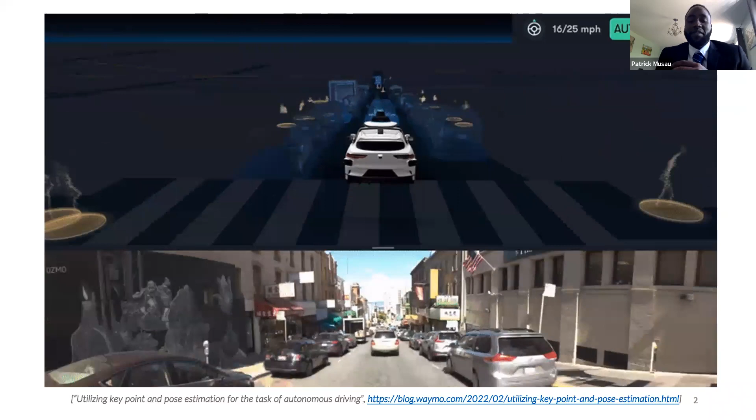Over about the last decade, with steep advances in sensing technology and other hardware, there's been a real interest in using AI methods to lay the groundwork for the proliferation of a diverse set of semi and fully autonomous systems. One such example is the growth of the autonomous vehicle industry, which according to McKinsey has seen over $330 billion invested into over 2,000 mobility companies since 2010.

And while much of the technology within this space has moved forward expeditiously, formal safety assurances for these systems still lag behind.

So building these systems is quite a complex endeavor, and it requires designing the system such that it can navigate in dynamic and uncertain environments. A task that often combines traditional programming with machine learning, since some actions are difficult to characterize explicitly, and they're more easily derived through data-driven procedures.

So as an example, autonomous vehicles frequently leverage machine learning to semantically parse their environment and navigate appropriately. Unfortunately, as we've seen in recent years, some of the advantages of machine learning come at a cost of fragility. And what I mean by fragility is that these components can fail in unexpected ways.

So in a famous study by Christian Szegedy and his colleagues, the authors demonstrated that by carefully applying small modifications to input images, you could cause these components to produce incorrect classifications. These inputs are known as adversarial examples, and their discovery has really caused concern over the safety, reliability, and security of these machine learning applications.

But beyond adversarial examples, the number of edge cases that an autonomous system must be able to handle is quite large in practice. And despite our best efforts to estimate all the foreseeable scenarios that these systems must be able to deal with, we don't have any way of knowing that we've identified all the possible threats to, or even the failure modes of the system.

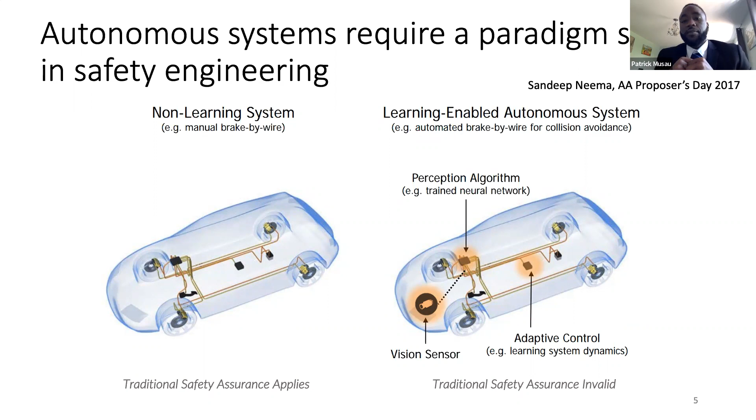The safety assurance arguments we develop for these systems must deal with the reality that realizing autonomous technology involves a combination of heterogeneous physical, networking, and software components, yielding systems with numerous interfaces and interrelations that require careful attention. Systems that exhibit these interactions are referred to as cyber-physical systems, where the underlying principle is that computational and physical aspects cannot be easily decoupled.

As an example, changing the rate at which software executes within a particular component will have consequences on the types of behaviors it can enact. So the safety assurance question for cyber-physical systems requires interdisciplinary efforts drawing from real-time systems, control systems, hardware design, and safety engineering.

But even more important is how these systems are integrated to form a cohesive whole, which is itself a non-trivial problem. To this end, the two research questions I addressed in my PhD are: one, how do you develop safety assurance arguments for autonomous systems that operate within dynamic and uncertain environments? And two, how do you reason about safety when machine learning components are deployed within these systems?

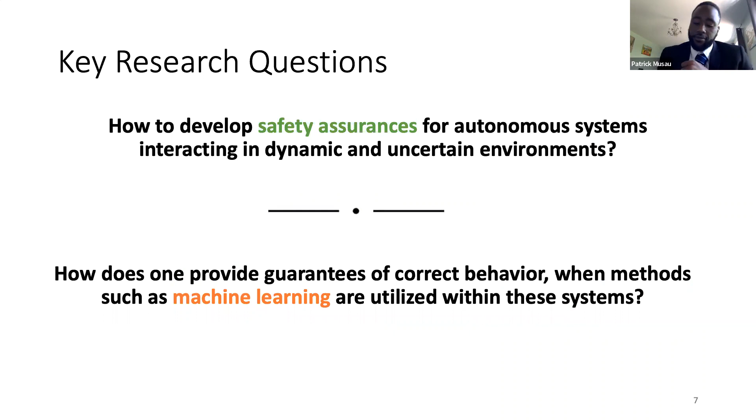Much of the work I've been involved in draws on formal methods, a class of mathematical techniques used to specify what the system can or cannot do. This framework is governed by the use of models or abstractions of the overall system, which might include modeling its physical dynamics as well as the underlying software. Using these models, you can analyze the behavior of the system and check if it satisfies a set of requirements derived from industry standards and best practices.

If the system satisfies these requirements, then you can provide the artifacts that led to that conclusion. But if not, the task is to obtain an example of incorrect behavior that can be used to refine its construction. These analyses are often done at design time.

We want to ensure the system is constructed properly from the beginning and avoid expensive, non-trivial changes that would be necessary if these analyses were done after the fact. However, we also need to perform such analyses online to make sure our design assumptions are still valid at operation time, since at design time we don't have any way of knowing we've identified all the specific threats or failure modes of the system. So it's imperative to continually monitor the system as its objectives and environment evolve.

With that in mind, my work over the last couple of years can be divided into two camps. The first is the design of runtime assurance techniques for components within autonomous systems. The second camp is helping create design-time assurance techniques for machine learning components.

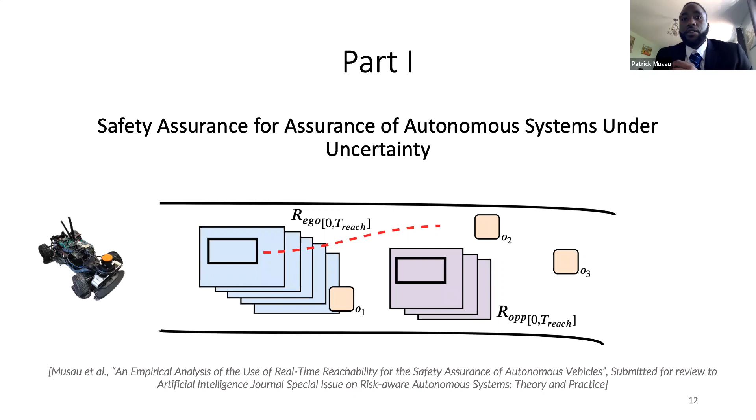I want to start first by introducing the three major building blocks of autonomous applications and highlight where machine learning components can assume a significant role.

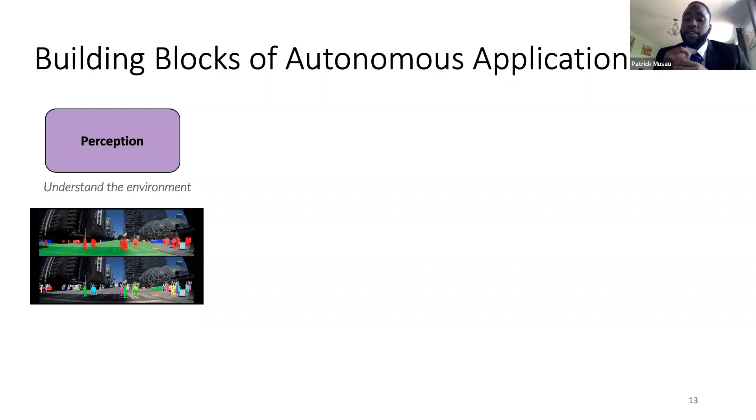So the first major task is perception. In order to successfully navigate through the world, the system must have a deep understanding of its environment and how this environment is evolving over time. Based on this understanding, the vehicle must then come up with a plan for how to move in this environment in order to accomplish its high-level goals.

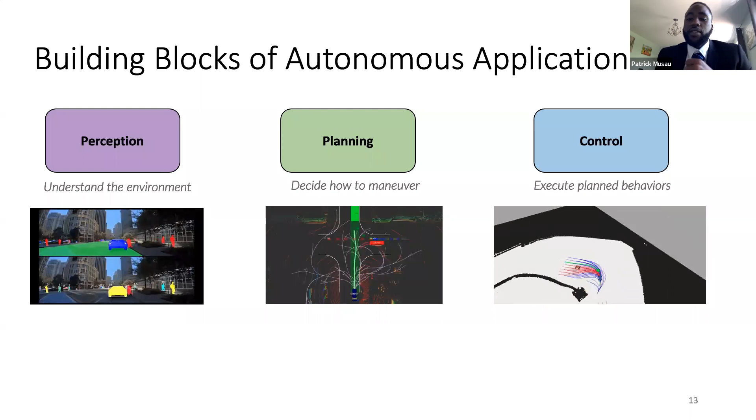Once a plan has been generated, the vehicle then needs to be able to generate the steering and throttle commands that allow this plan to be executed. The interactions between these tasks determine the success of your system.

Classically, machine learning has been used within the perception and control stacks due to the inherent complexity of outlining the relevant operation zones where the vehicle can drive, classifying and tracking obstacles within the environment, and even projecting how humans or other vehicles will move within this environment. Since manually coding up solutions to all the possible scenarios is infeasible, machine learning models are an attractive solution here, since you can train these models to handle these tasks based on massive data sets of driving these vehicles in a variety of contexts.

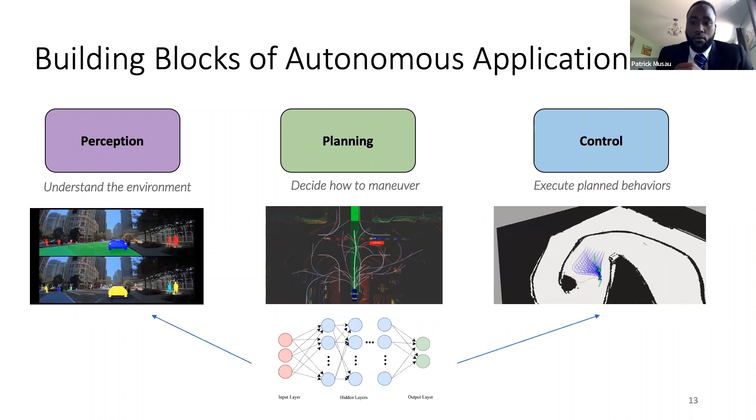So now if we assume that we have some working model of the system, or we have some solution to the previously mentioned tasks, one of the things that we like to do is demonstrate that our implementation is robust and works well in practice.

One of the questions that we like to answer is what happens if the predictions that our machine learning components are making about the environment are wrong, and lead the system to make a bad decision. In this case, what we'd like to be able to do is intervene whenever we think an errant decision has been made, so that our system remains safe at all times.

One of the ways this can be done is by forecasting the effects of the control decisions made by the components in your system, to see, for example, if they ever lead to a potential collision. If you can do this rigorously and effectively, then you have a robust way of arguing that your system operates correctly.

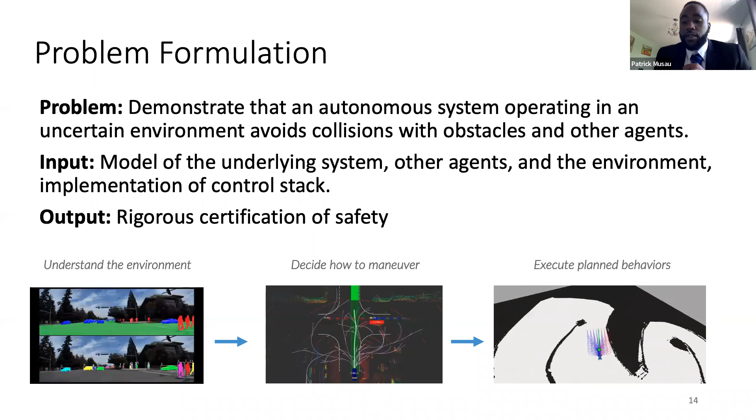So now one way of reasoning about the correctness of a system over a large set of scenarios is called reachability analysis. One of the key benefits of reachability analysis is that if you have a realistic model of your system, then what you can do is forecast the evolution of the system over a finite time horizon that you're concerned about, and obtain the set of behaviors that your vehicle enacts.

Here, I'm referring to dynamical systems analysis, where you have some model of the physics of the vehicle that is often described by a mathematical tool known as a differential equation. Based on the control decisions of your components and the model of your system, you can use these equations to obtain the future evolution of your system.

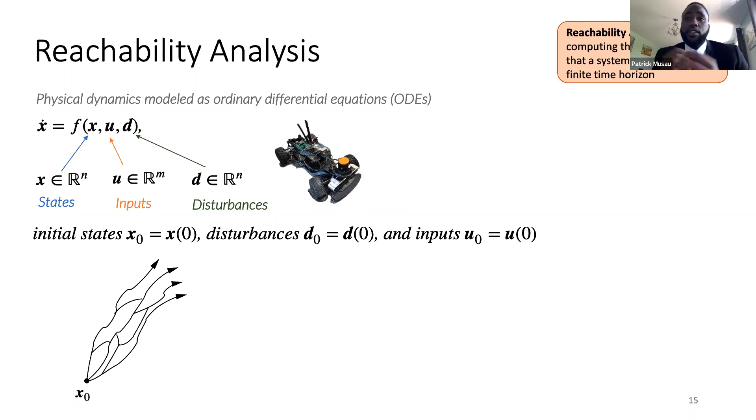While you can do these as point-wise analyses of the system, where you have some unique estimate of its initial state, one thing you might be concerned about is the evolution of the system over large sets of scenarios. You would like to be able to reason about the correctness of your system for every point within that space.

So now the problem becomes rigorously reasoning about the evolution of your system over sets of initial states, inputs, and even potential disturbances. The nuance here is that you're not discretizing these sets and then performing your analysis, but rather you're rigorously exploring the behavior of the system for every point contained within that set.

Now, there's a rich set of literature and software tools available for the reachability analysis of many types of systems. One of the key characteristics of these approaches is that it's often prohibitively difficult to obtain the exact reachable set for many classes of system models.

So you customarily compute a sound over-approximation of the set, such that the actual behavior of the system is contained within that larger over-approximation. There are many ways of representing that set, and depending on the type of representation you use, you can characterize the actual executions of your system more and more closely. The challenge here is that there's usually a trade-off between the fidelity of your reachable set computations and the time that it takes to compute them.

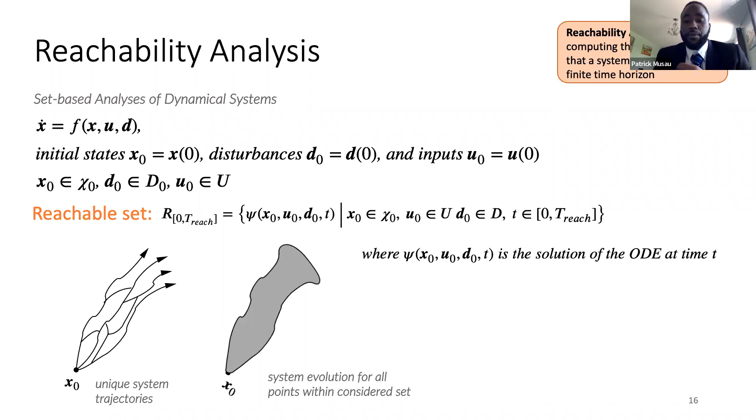As an example, if you use a set-based representation called hyperrectangles to describe the evolution of these systems, then these computations can be done in real time. In our work, we utilize this formulation to describe the autonomous platforms that we considered.

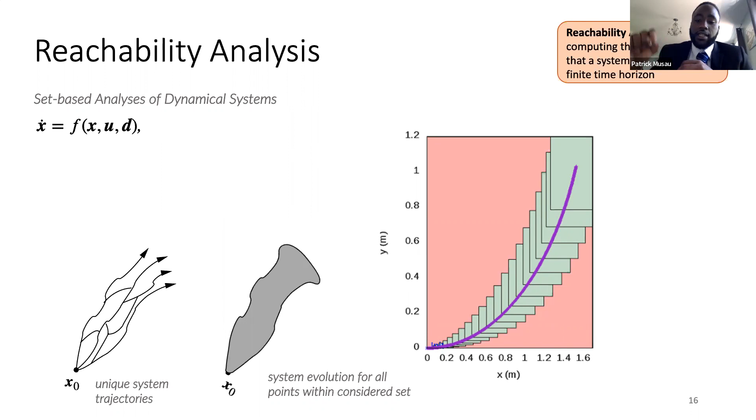In this figure, we are showing a 2-second projection of a left turn action for a 1/10 scale autonomous vehicle. The green rectangles here represent the set of states over this finite horizon, where this purple line is a simulation of a single point from the initial set that we considered.

So now coming back to the original safety question, the reason that reachability analysis is so helpful is that you can pose the safety problem as ensuring that the reachable set of your vehicle that you're concerned about never intersects with the obstacles within its environment, as well as the set of reachable states of the dynamic environmental participants.

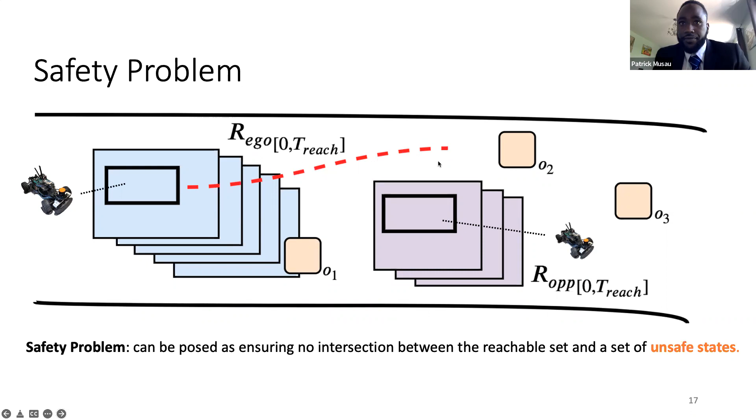So there are several assumptions that bear mentioning here. The first is that we have an assumption about the underlying dynamics of the car. In this case, those were obtained using a process known as system identification, where you record the data of driving the vehicle in a diverse set of contexts, and then use those experiments to tailor a physics model to be able to describe its behavior. In this case, we utilized a kinematic bicycle model, which is a particularly useful model for describing front steering vehicles.

The second assumption is we assume we have an accurate method of measuring the position of static and dynamic obstacles, as well as the position of the vehicle, which requires an assumption of accurate sensor measurements. And the final assumption is that we assume that the control action used in the reachable set derivation is constant throughout their construction.

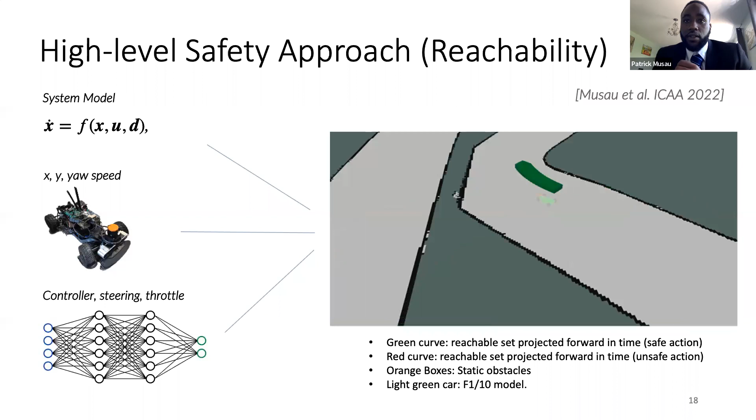So as mentioned earlier, one of the major challenges in autonomous applications is handling uncertainty. And since reachability regimes are inherently a model-based technique, the fidelity of our predictions is dependent on the strength of these models. And if they're not good representations of reality, then any safety declaration made through their use may be invalid. So as a brief introduction to these challenges, there are broadly three realms or sources of uncertainty within autonomous applications.

The first is that the vehicle's understanding of the world is largely mediated by its sensors, and there are limits to the precision of the measurements of these sensors, which might also be affected by the type of environment that you're moving within. So it's important to allow for sensing uncertainty in your reachability computations.

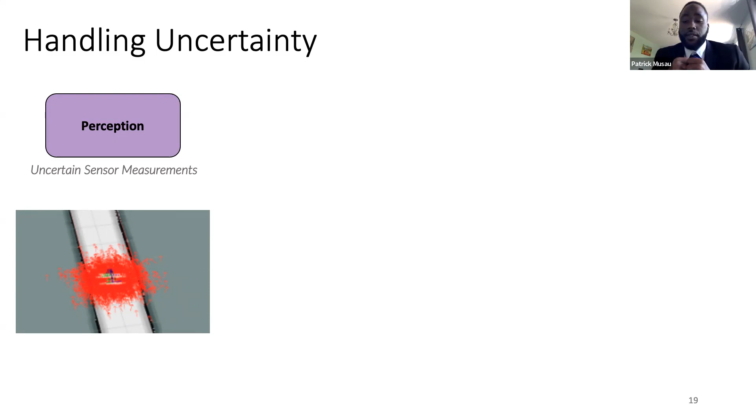The second major headache is that it's quite challenging to characterize the behavior of dynamic agents within the environment precisely, and the models that we utilize to describe their behavior need to be able to capture this reality. Finally, the models that we use to describe the physical dynamics of the system is inherently an abstraction of reality, and capturing its behavior precisely is complicated due to the presence of phenomena that are hard to characterize explicitly, such as drag forces, friction forces, non-observable disturbances, and other stochastic elements.

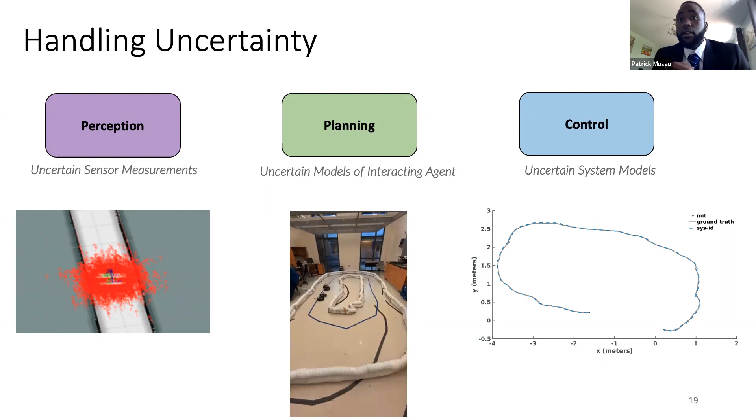So within the research literature, these two sources of uncertainty can further be classified into two major domains: epistemic uncertainty and aleatoric uncertainty. Epistemic uncertainty refers to the uncertainty that is attributed to a lack of knowledge of the dynamics of the system and its environment, and it can be reduced by conducting more comprehensive experiments of the behavior of your system, or even using a more precise set of sensors to better understand the environment.

Aleatoric uncertainty, however, refers to irreducible random uncertainty, and it is characterized by the variation of physical systems due to random effects. So within our context, an example of where aleatoric uncertainty would show up is in the models of the behavior of the dynamic agents within the environment. And while it's possible to come up with a probabilistic description of their behavior, in practice, the behavior of dynamic agents within the environment can be unpredictable.

But the overall idea here is that if you can come up with an estimate of the variance of these parameters in different contexts, then what you can do is use reachability analysis to explore the behavior of your system over these large sets of scenarios and see if the system satisfied the required levels of consistency, robustness, and quality governed by the assumptions of these estimates.

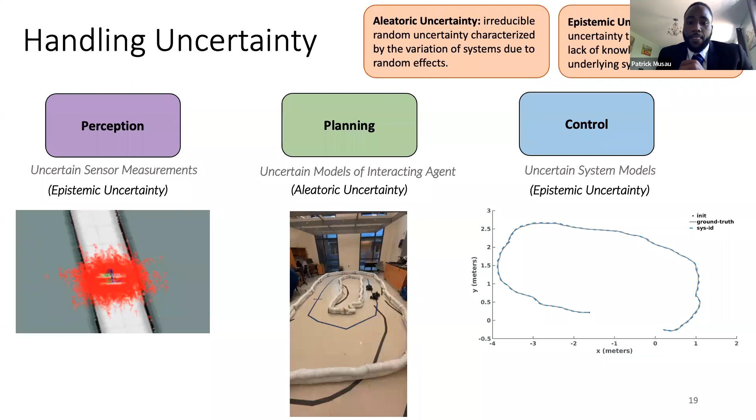So let's now think about uncertainty in a principled way. Let's assume that we have a model of the underlying system.

Since the experiments we've been talking about involve this 1/10 scale autonomous remote controlled car, let's assume it can be described by a kinematic bicycle model, which is a decent model for describing a front steering vehicle moving at reasonable speeds.

The dynamics here are represented by an XY position, a heading variable, and a variable describing the system's velocity. While this model applies to many vehicles in practice, to get it to describe the F1/10 model precisely, we had to tune three parameters within this model, mostly around the vehicle's velocity profile, to capture how the system's throttle commands affected its movement.

Specifically, the parameters we had to determine were the acceleration constant, the hysteresis constant, and the motor constant governing its behavior. As you can see below, we were able to obtain quite an accurate model using data collected from a large set of experiments.

Now let's assume that we want to describe the uncertainty in our estimates of the vehicle's state, such as its position or velocity. For example, let's say our estimations of the vehicle's position and velocity are only accurate to within plus or minus 10%. Then we can allow each of the variables in our model to be described by an interval, where an interval is a set-based representation of the ranges these variables can take on.

In doing so, you can explore all the evolutions of your system for all position and velocity values within that range. By allowing the variables in your dynamics model to take on these set-based representations, we can now model the behavior of your system by what is known as a differential inclusion, which is a generalization of ordinary differential equations to describe set-based dynamics.

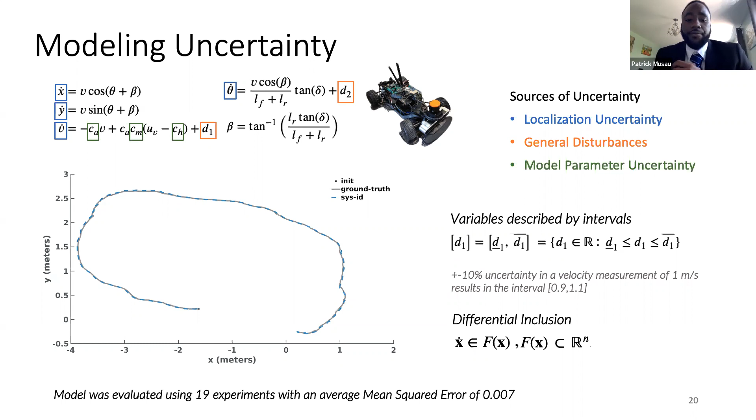So now let's look at how this looks in practice. One of the things we considered in our experiments was modeling the uncertainty of determining the position of the autonomous system, which is arguably one of the most difficult and fundamental parts of the entire process. In a real autonomous system, estimations of the vehicle's position within the world must be accurate to within 10 centimeters or better, which has resulted in numerous methods proposed for solving this problem.

Within this context, one of the most popular localization techniques are called particle filtering methods, which allow you to describe the vehicle's position using a probability distribution. The idea here is the position of the vehicle can be represented by a large set of particles that describe our estimates of the vehicle's position and orientation.

Typically there's a large number of these particles that converge around the vehicle, and they're refined using measurements from its sensors as well as presupposed motion models. One of the things you can do is explore the behavior of the system from all of these estimates to assess if your system is safe.

So now beyond localization uncertainty, how would you deal with the uncertainty coming from the vehicle sensors, as well as the uncertainty with respect to the evolution of the agents tracked by these sensors? Well, you can approach the problem in a similar manner.

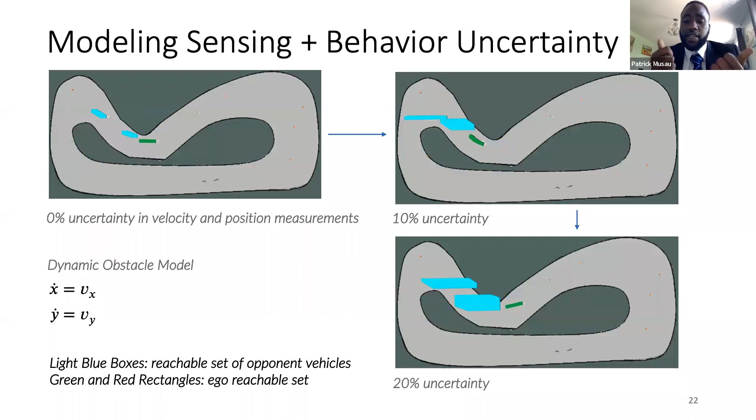The same can be done in modeling the underlying uncertainty in your system models. If you allow the parameters of your model to be described by intervals, such as the acceleration constant, the hysteresis constant, and the motor constant, then you can reason about large sets of behaviors utilizing this approach. A potential application of such an analysis is characterizing the behavior of your system operating on different road surfaces or even different weather conditions.

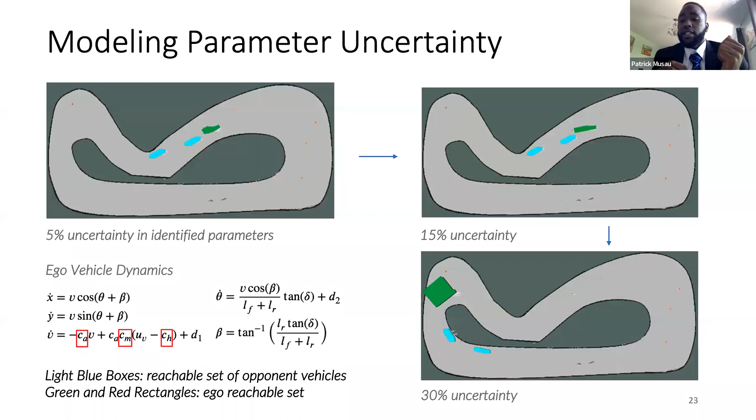Up to this point, we've been discussing how one would detect potential safety violations made by the controllers in a variety of contexts. But a crucial question that must be answered is what happens when a problem is discovered by a monitor, and how do you maintain safety within this context?

One of the most popular frameworks for satisfying both requirements is the simplex architecture. This architecture is quite useful for switching between a high performance controller that may allow you to perform a series of really complex maneuvers, and another controller that may not be as performant, but you know will maintain safety.

Let's imagine the system is making use of a controller, such as a vision-based neural network. They might work quite well in many settings, but sometimes produce bad predictions. One thing you can do is use reachability computations to detect when an unsafe decision has been made, and then transfer control from this neural network component to a controller that's been designed to optimize for safety.

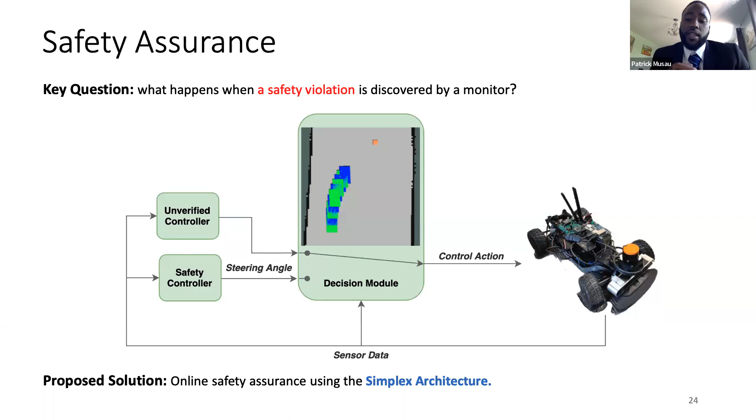A useful analogy of what we're doing here is a driving instructor's car with two sets of steering wheels and two sets of brakes. As long as the instructor is capable of intervening in dangerous situations, then the speculative student is allowed to drive.

So if you put everything together, if you leverage the reachability approach for the detection of these potential safety violations, and then make use of this architecture to switch between a high performance controller and an underlying safety controller, then what you get is a method for assuring the safety of controllers within autonomous applications.

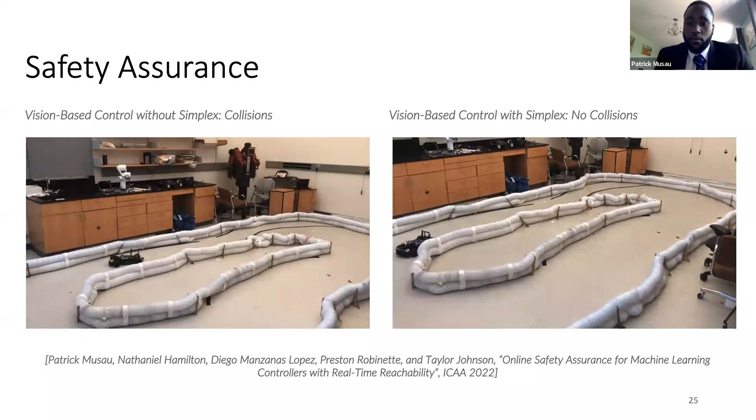Now, if we return to our conversation about uncertainty, you can also include these analyses within this context. What you will find is as you increase the uncertainty in the underlying models used within your reachability computations, the use of the safety controller within the simplex architecture also increases quite significantly.

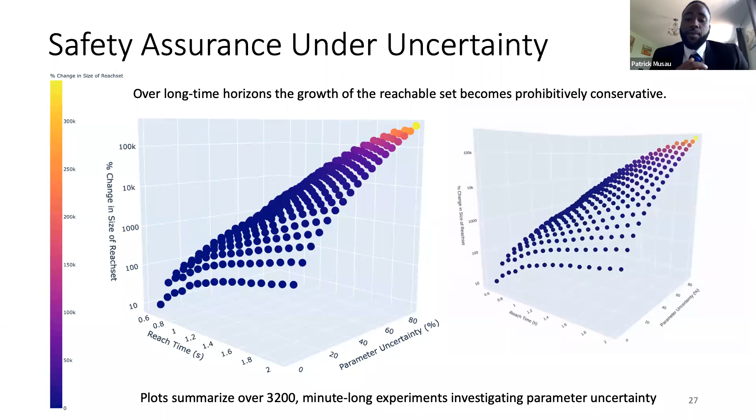To summarize what we've seen so far, we developed a reachability-based safety assurance framework for reasoning about the safety of systems in dynamic and uncertain environments.

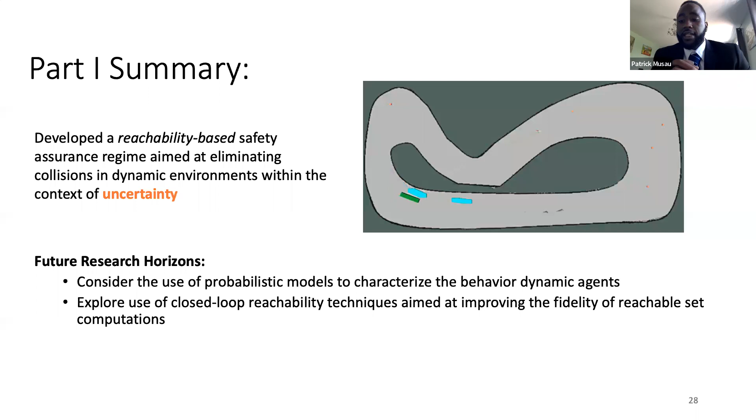In terms of future research, many autonomous systems make distributional assumptions about the environment, requiring probabilistic modeling, particularly around the behavior of dynamic agents. Extending this approach to consider the use of these models would be interesting. Additionally, one assumption we made was that the control action used in constructing the reachable set was constant throughout its derivation. It would be interesting to explore closed loop reachability techniques aimed at lowering the conservativeness of these resulting sets.

Now for the second part of my talk, I'd like to take a different perspective within autonomous systems development. In the last project, we were concerned with making sure the actions of these controllers did not lead the vehicle into unsafe situations. But we didn't consider the performance of these controllers at driving the vehicle within its environment, and the second part of my presentation deals with this latter objective.

How can you use reachability analysis to generate high performance controllers for autonomous systems? Specifically, the inspiration for this project came from our participation in an international autonomous racing competition known as the F1Tenth.

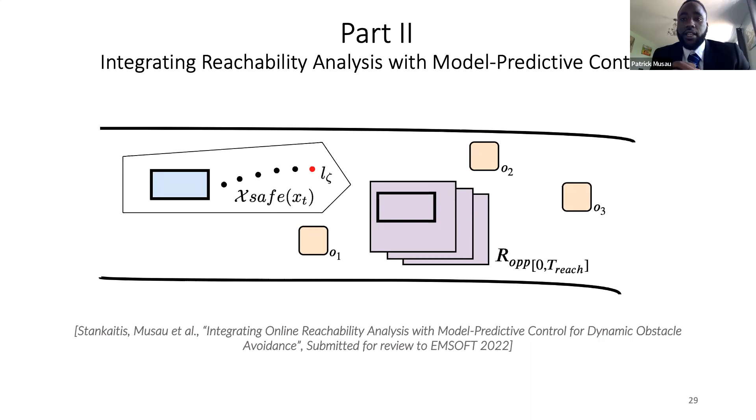It might sound counterintuitive to think about autonomous racing in the middle of a talk about safety assurance techniques. But one major motivation for considering the racing problem is that it allows you to study problems like high-speed obstacle avoidance and other high-risk maneuvers that may be too dangerous to consider in urban settings.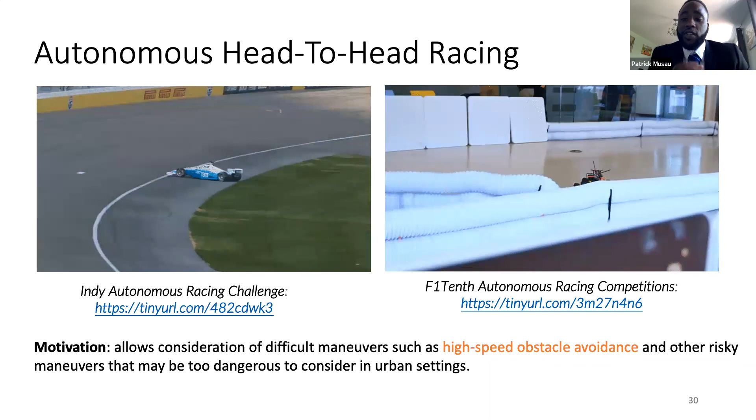There have been several high-profile competitions over the years, such as the Indy Autonomous Racing Challenge that occurred at CES earlier this year, where teams from 21 universities competed in a series of races involving full-scale Formula One racing cars at the Indianapolis Motor Speedway. There have also been smaller scale competitions occurring biannually at conference venues across the world, known as F1Tenth. One major challenge is figuring out how to deal with the aggressive and uncertain behaviors of opponent vehicles at high speeds.

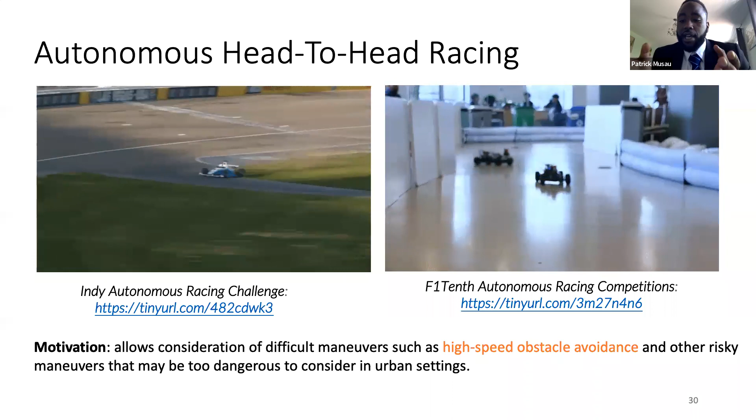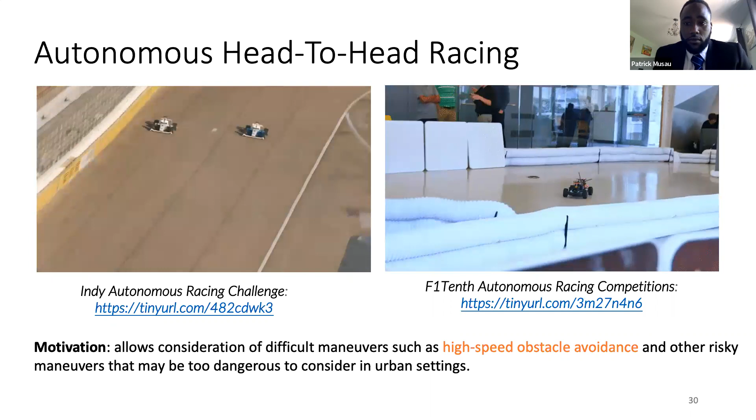As you can see from the GIFs on screen, optimizing for speed while ensuring you don't crash is not straightforward. Fortunately, we've already seen how to handle uncertainty in characterizing the behavior of dynamic agents within the environment. Building on that work, our idea is to design a controller that explicitly uses our estimation of their reachable sets to avoid entering situations where a collision is likely. If we can avoid this set at all times, we can have a reasonable guarantee that we'll be safe. So the question now is, how do you generate these controllers to accomplish this task?

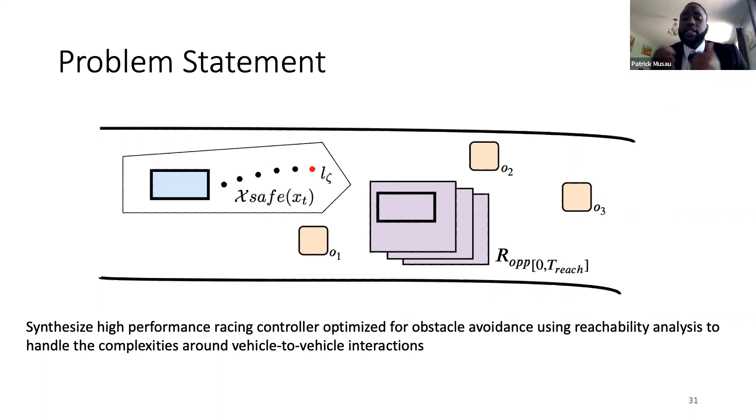One of the most powerful methods for solving this problem falls under a framework known as model predictive control. This is an optimization-based method for determining the best set of control actions to perform some underlying task. For example, if your desire is to find the steering and throttle commands that allow you to follow the best racing line, you can view this as generating inputs that minimize the time needed to travel along that trajectory, while not deviating from the racing line very much.

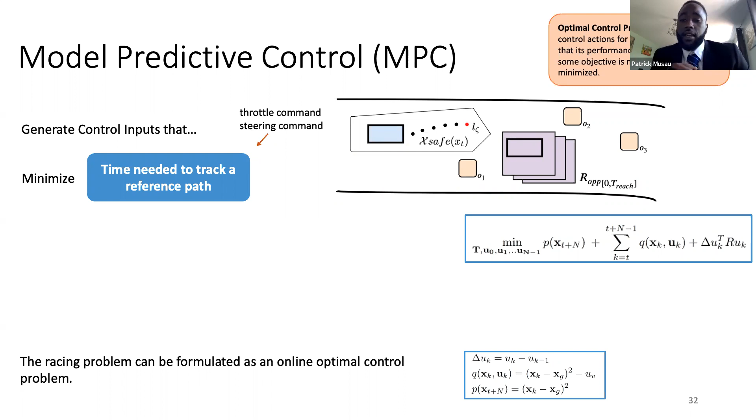One thing that might happen is that you simply follow this path at maximum speed. But that's undesirable since the chance of spinning out is quite high. You want to generate these inputs in a way that respects these constraints. To do that, the approach must take into account the physical dynamics of the vehicle, as well as constraints on the types of actions it can take.

For example, these can be limits as to how fast you turn or even accelerate. With these constraints, you can ensure that the actions produced by this framework will be reasonable in nature. One thing to note is that the search for these inputs is done continuously as you move throughout the environment, and you're really only considering the best actions to take over a short time horizon. This allows you to deal with the dynamic nature of the environment as well as the vehicle.

So far what I've laid out is the classic setup of model predictive control. What you can do is augment this framework to include constraints derived from your desire to avoid obstacles, including the reachable set of opponent vehicles as well as static obstacles. This is primarily what we looked at doing in this project. The idea is to limit the search space of the optimization problem to guarantee that the inputs generated by this method allow you to remain within a safe region of the state space.

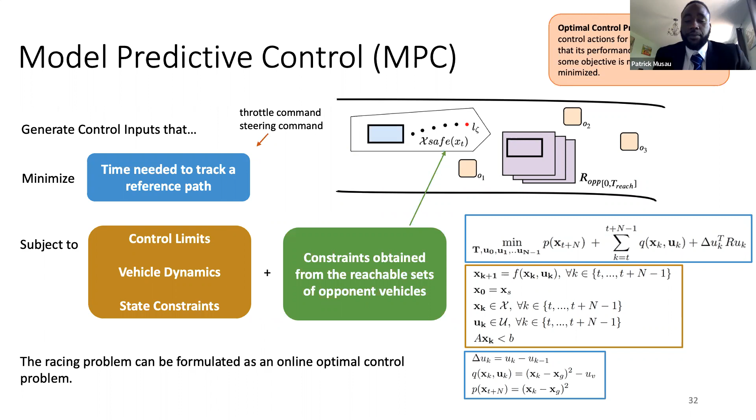So while this seems relatively straightforward, one of the challenges of requiring the vehicle to assume positions outside the location of obstacles is that it converts your search for the best control action into a non-convex optimization problem. But what does that mean?

The idea behind a lot of optimization problems is that we're trying to minimize the value of some function that may capture, for example, the time needed to track a path throughout the environment. If the function is convex, then finding the value that minimizes this function is relatively straightforward, and you can be sure that the answer you're given is indeed the best answer. But if the optimization is non-convex, then the problem is significantly harder and takes more complicated strategies to find the best inputs.

Although some good solutions to this problem have been proposed recently, convex optimization approaches are generally far more efficient. So what we'd like to do is come up with a way of specifying our safety constraints that allows us to generate these actions quite efficiently.

If we look at the existing literature within this space, there have been two main approaches to solving this problem. The first camp of methods have entirely avoided specifying safety constraints as part of the MPC problem, handling them instead within the planning layer of the autonomy stack.

So instead of generating control inputs that are guaranteed to be safe, you can instead synthesize a safe trajectory and then simply track it. A challenge here is that many planning approaches don't reason about the underlying dynamics of the vehicle to a sufficient degree when planning, which can sometimes lead to behaviors that are less than optimal. At the same time, many approaches cannot be executed fast enough online to deal with the high speed and aggressive behavior of other vehicles.

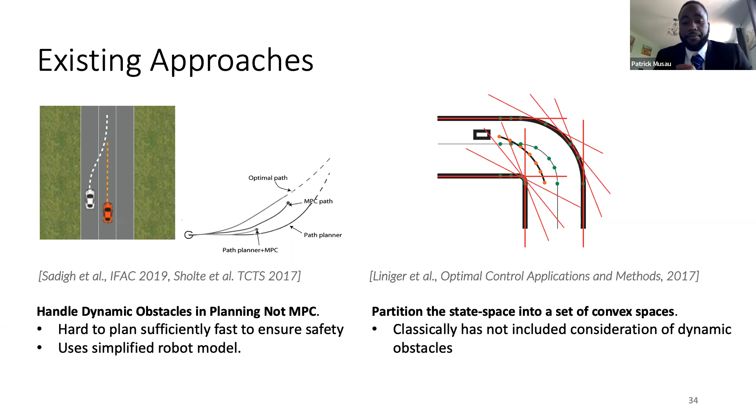So building off their work, we explored altering their approach to handle dynamic obstacles by letting these planes have different positions and slopes depending on the state of the vehicle. This would allow you to handle the case where a dynamic obstacle is directly in front of you, and it would also allow you to increase the space where the vehicle is allowed to navigate.

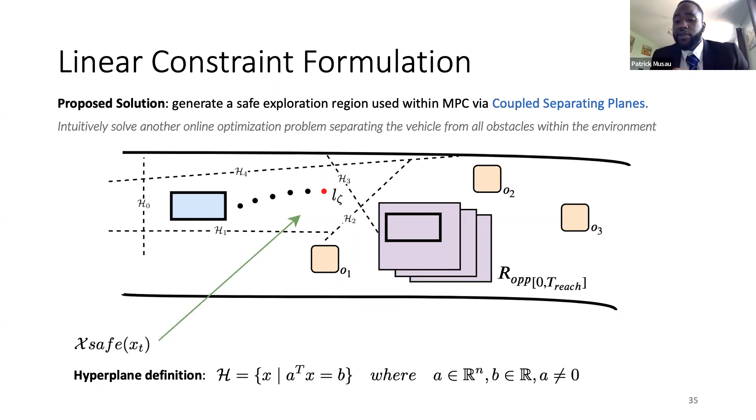Now, there's no requirement that you only use two planes, and in practice you can use as many as you would like. However, one of the challenges here is that in order to determine their slope, you have to solve another optimization problem online that generates these planes. In most scenarios that we considered, two planes is sufficient. If you use this formulation, you now have a way of specifying your safety constraints in an efficient manner.

So now if we return to our original problem formulation, what we've effectively done is circumvented the need to encode the requirement of limiting our search space to be outside the space of obstacles, into deriving these two linear constraints represented as planes. In doing so, the problem can now be efficiently solved by existing model predictive control tools.

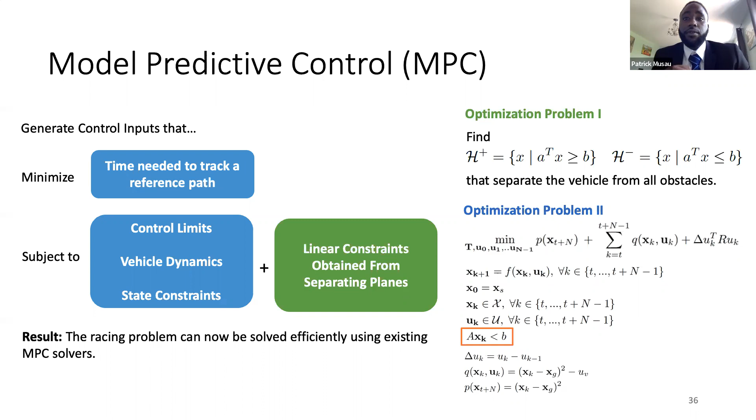I'd like now to show you a demonstration of evaluating our approach in numerous contexts. On the left, you can see the approach proposed by Alex Liniger and colleagues, where parallel lines are used to describe the safe region. On the right is our extension, allowing the slope and position of these planes to be altered online.

Based on sensor data and our reachability computations, the red boxes are a set of dynamic obstacles whose evolution is determined only from vehicle sensors. The blue rectangle is an opponent agent whose behavior is described by our reachability computations, and the magenta dot is a target point we're trying to reach as we navigate the environment.

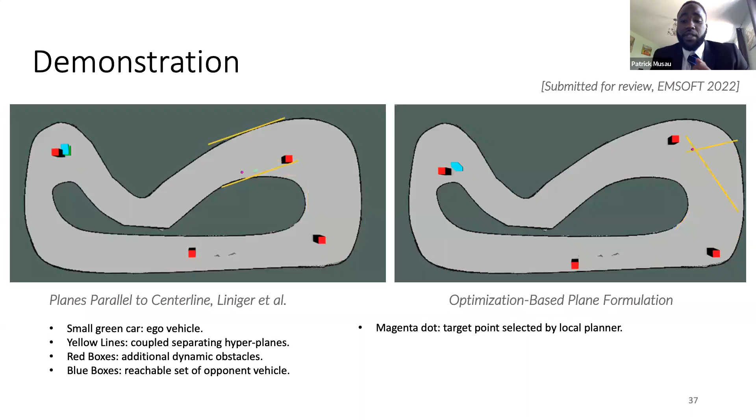This target is synthesized by a couple of different planning techniques. Our evaluation was quite complex in the types of scenarios considered, and in practice it was quite successful in dealing with the dynamic nature of these environments.

So what are the challenges and limitations of these approaches? As previously mentioned, one challenge with the parallel plane formulation is that it can fail when obstacles are directly in front of it. Avoiding collisions is highly dependent on the underlying local planner guiding the selection of a target point that MPC is optimizing to reach. In some cases, these planes can actually lie on top of each other, resulting in no safe region to explore—an example of this is shown in the video on the left.

While our optimization-based plane avoids this problem, one challenge here is that the computation time needed to generate these planes increases significantly as you increase the number of obstacles in the environment. The other challenge is that, depending on the objective function used to specify how these planes are generated, this can take prohibitively long. But these functions allow you to optimize for the space in which your controller can select good actions—so there's an inherent trade-off within this space.

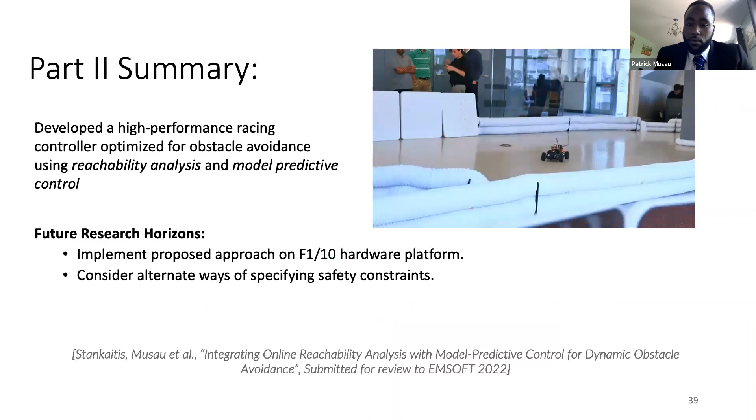As a summary, what we've seen here is a method for generating high-performance racing strategies through the use of reachability analysis and model predictive control. There are a lot of exciting areas for future research, including considering the application of these approaches on the F1/10 vehicles.

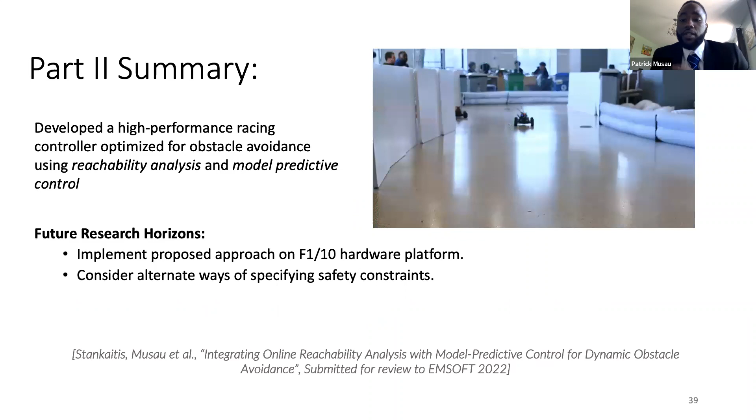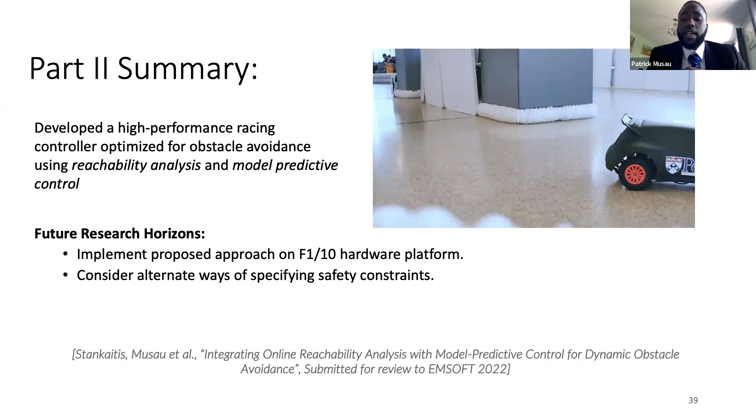Additionally, there have been several other exciting methods for specifying safety constraints within optimal control problems, and several of these approaches would allow for an investigation into developing more and more effective racing strategies.

So I'd like to conclude by saying that formal methods are a powerful mechanism for thinking about the correctness of these systems. In this talk, we surveyed how a class of formal techniques involving reachability analysis can be used to handle the safety question in dynamic and uncertain environments. Moreover, we touched on how reachability algorithms can be used to derive optimal controllers for autonomous racing.

In terms of open research directions, there's still a lot of work to be done within this space, and I'd like to touch on a few particularly exciting areas. The first is that, so far, the work we've looked at has treated the traditional formal methods problem, where the safety question for the system is treated as a yes or no answer.

But many learning-based applications are specified in terms of objective functions, where a system tries to optimize its behavior in terms of cost or rewards. Moreover, there can be multiple objectives, some of which must be satisfied together and others that may need to be traded off against each other in certain environments. So a key question in this space is: what are the best ways to unify this yes-no formulation of formal methods with these quantitative approaches to reasoning about correctness?

Another active area of research is the consideration of systems that learn online, frequently making use of machine learning methods such as reinforcement learning. The key question here is how to adapt these formal approaches to such systems—either to account for future changes in system behavior, or to be performed incrementally and online as the system evolves. And if online safety approaches are used, like the ones we've seen in this presentation, how do you prevent the machine learning mechanisms from becoming overly reliant on these safety mechanisms? This is a key challenge within this space.

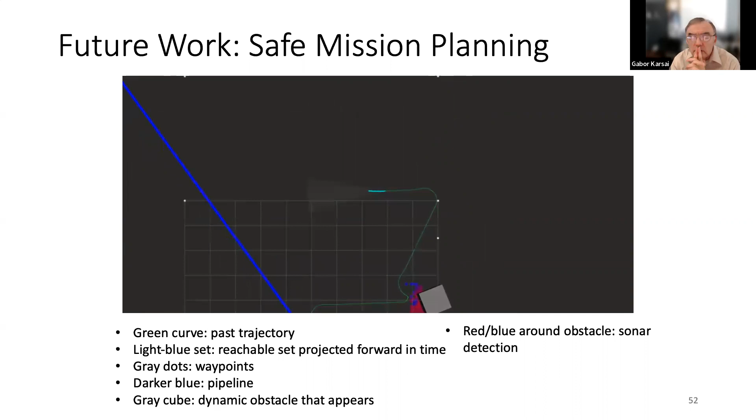I understand that everything worked out well in the experiments. You mentioned somewhere that on the TX2, when you tried to execute it, it was missing just a few deadlines. But in safety critical systems, you often have to always meet the deadlines. So how would this work in a safety critical environment, which is also timing critical?

Yeah, I think that's a good question. With respect to all the experiments that we conducted here, we didn't really leverage any real-time operating systems. So specifying the deadlines for each of the computations that need to be executed wasn't possible. You're really just relying on the underlying operating system.

But if you're going to do this in a safety critical system, you definitely need to use a real-time operating system. With respect to the reachability algorithm, it's been designed in a way that it doesn't need dynamic allocation and can be run within these environments quite well. So one of the things to consider is how would you use this within a real-time operating system.

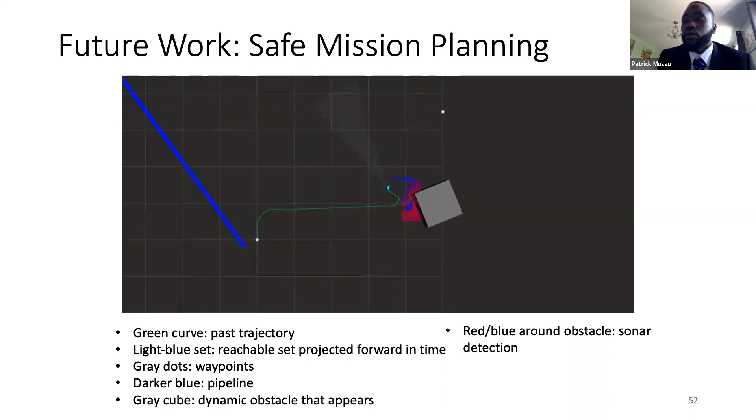Okay, that's good. Thank you. Yeah, and I think you have a table with all this too. I don't know if you have it in the slides, but we did characterize this. We did, I don't think I have them in this presentation. Okay, it's in the dissertation though, and in one of the papers. Because yeah, this is important, right? It's the evidence for this, and this is an important constraint.

Okay, any last audience questions?

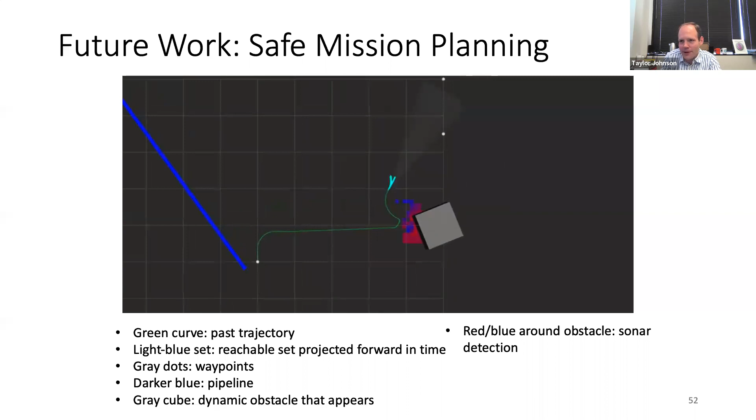Okay, I'll ask a high level question. I think the committee has asked most questions already, but you talked some about it. I know you're finishing your PhD, but what would you give someone who is starting a PhD in this kind of area? What project do you think you would give them? You talked some about future work, but what would your suggestion be?

I think the verifiable training and data generation stuff is probably what I would give as a project for someone. It's very interesting that within the last years we've come up with a lot of techniques that allow you to demonstrate when these systems aren't performing well, but coming up with ways that you can also generate data that makes the system better based on how these systems are performing would probably be interesting. As a concrete problem, looking at closed loop reachability analysis for these systems would be interesting. It's a little bit difficult when you're considering perception models, but that would be one.